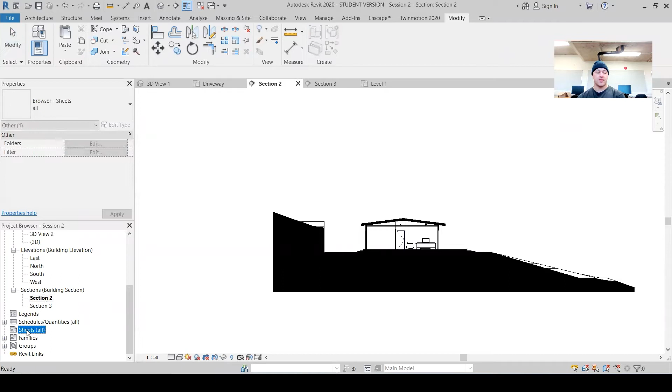So to get started, we want to first create a sheet. This will be kind of like our page where we put our drawing on. So first you want to go down to sheets in our project browser. And if you don't have a sheet already, all you have to do is right click and go new sheet. Now it'll load a little window, and usually it has preset title block pages with different sizes.

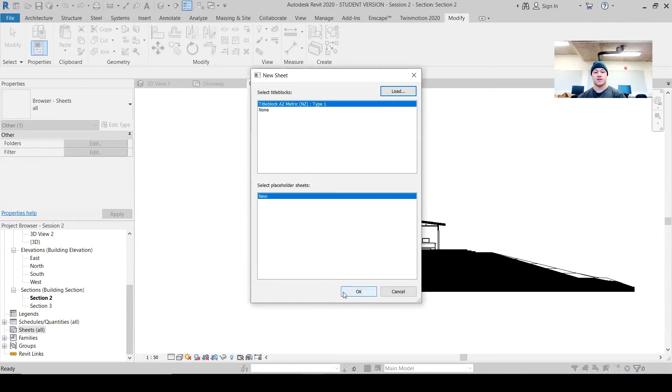If you don't have any, or if you just have one, you can edit it. So we'll go through that now. So if you just select one, or if you go load, you go into the title blocks, there should usually be a few others. But for the meantime, we'll just use this A2 one, and we can edit it and change the size of it as well.

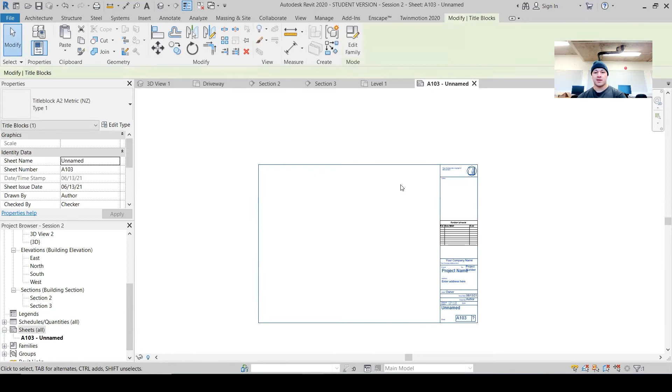So if I just go load, this is our sheet, and it pops up in our project browser as well. Now to edit the size, we'll change this to an A3 sheet. So right now, this is currently 558 millimeters across. So if I want to change this to an A3 size, I want to select the sheet, and then I want to go edit family.

Now it will take me to another window, and this is where we can edit the actual sheet itself. So what I can do is just select all these little text boxes and the lines, and delete them. Really all I want is just this outline for our sheet. So you can just delete all these things.

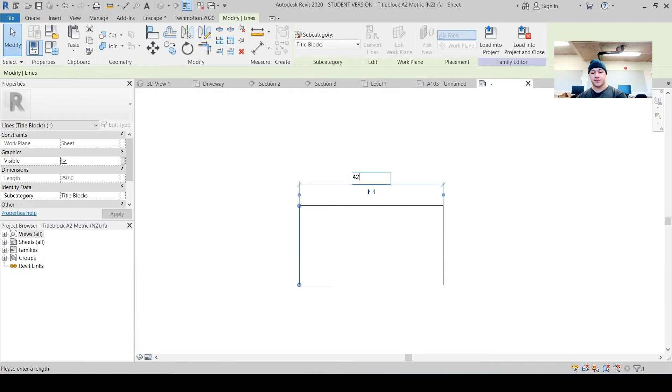Okay, now that we've got this little box here, I want to change it to the dimensions for an A3 sheet. So I'm going to change the height to 297, and change this to 420. Just make sure: 420, 297. Cool. So that's how you change the size to make it A3, or if you want to change it to any other paper size, just get those dimensions out. Again, this is in millimeters.

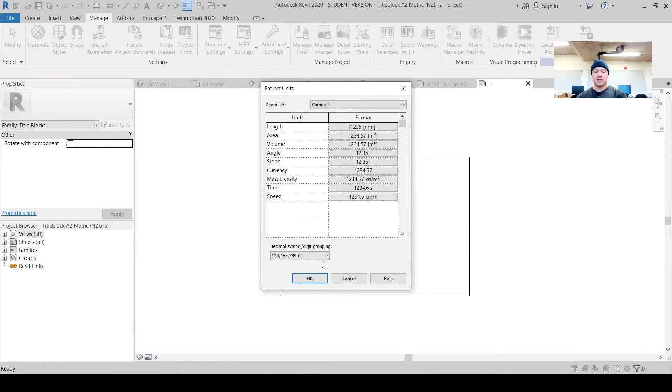If your project's in inches or anything, all you want to do is go manage, go project units, and this is where you can change the units that your project is in. So if it's in inches at the moment, go into manage, project units, and change this back to millimeters or centimeters if you want to use that measurement, and then go okay. Since my project's already in millimeters, it should be all good. So again, 297, 420, that's our A3 sheet.

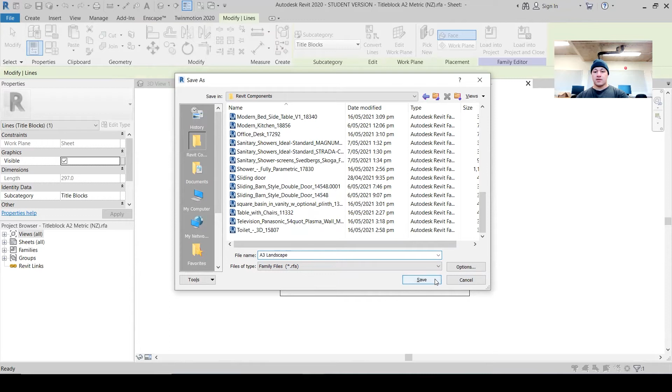Now I want to go load into project and close, and I want to save the changes to this template. I'm going to go yes, and you can save this into a folder that you want. I'm going to call it A3 landscape. Okay, and I'll go save, and then it will load our sheet back into our project. And I can delete this one, and here we have our new A3 sheet. That's pretty much the process in terms of creating a new template.

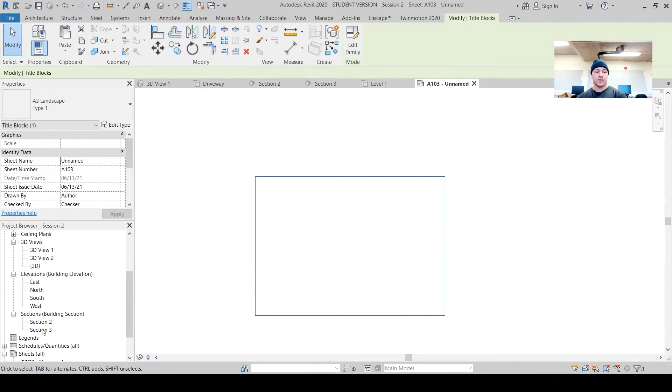To put our drawings onto our sheet, it's a pretty simple process. All you have to do is drag and drop the drawing from the project browser. So if I want to use a section, I just select it here, hold down the left mouse button and drag it onto our sheet, and when I click it in place, it drops our drawing onto our sheet.

As you can see, it's quite a long section, and most of it won't fit onto our paper, but we can edit the scale inside our drawing here. If I put my mouse over this drawing, it shows us the boundary of our drawing. Now, I can't edit the drawing right now.

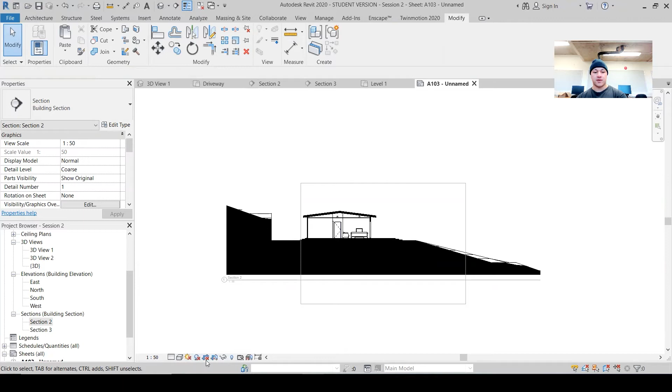However, if I click inside of this section window here, we get our display and graphic options back at the bottom here, and I can change the scale to a smaller scale. So if I change it to 1:200, we can see in relation to the A3 sheet, it's quite small. So if I change it to maybe 1:100, that's a better scale.

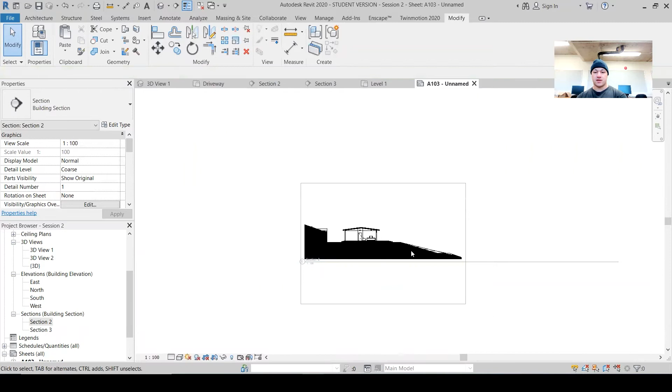And then if I click out of the window and select it, I can then move this across and move it inside our A3 sheet here. And if I want to edit it again, I'm going to click inside of this little box here, inside of the window. And here we can see I can actually edit the drawing as if I was actually in the section view itself. However, if I click outside of that area again, it's deselected and it's more so just the view itself. I can move it freely.

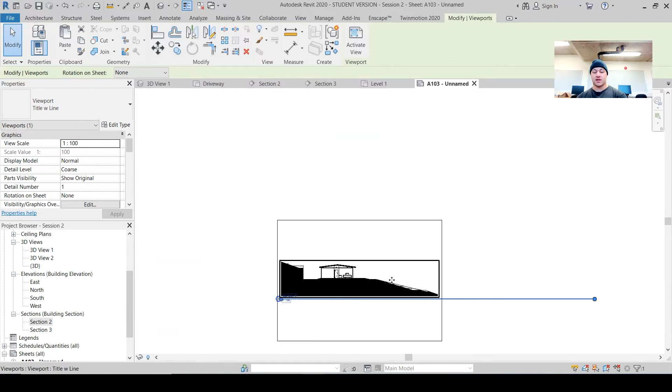So if you want to edit the drawing that you're putting on your sheet, just click inside this window here and click inside the actual drawing window. And then if you just want to move it, click outside of it just so it doesn't select everything in the drawing itself. To get rid of these lines or these titles, what we have to do here is click on the sheet, and then on this little drop down menu here, you can go no title, and it should get rid of that box for you.

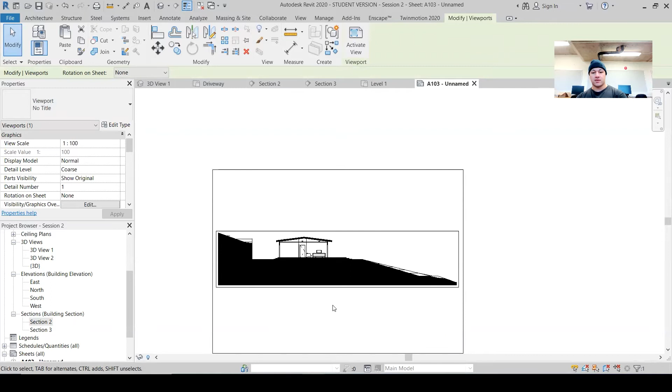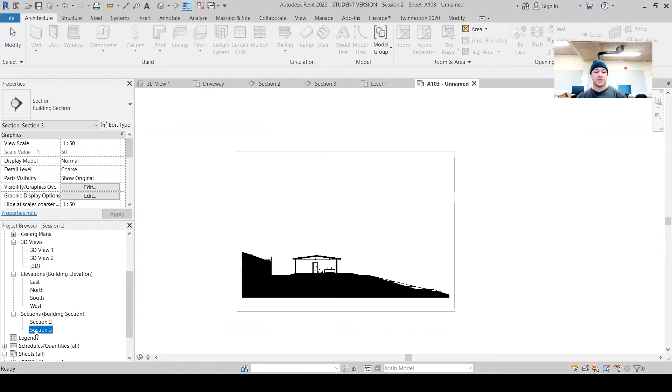Cool. So pretty much from here, it's up to you whether you want to add more drawings onto your sheet. If you just wanted to export the section, that's fine. If you wanted to export multiple drawings on the same sheet, same process again, just drag and drop your view or your drawing onto the sheet.

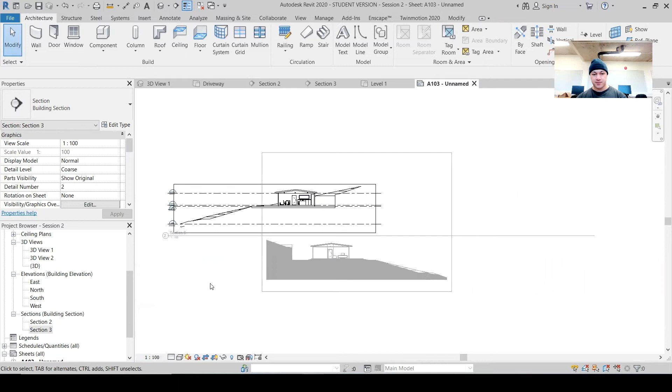Again, if I wanted to change the scale for this one, I'm going to double click inside of this box here, inside of the window, and then we can change all the properties really. And I'll change this to 1 to 100. I'll click outside of it so I can move it with the sheet view. And then if I wanted to crop this, it doesn't really matter if you don't crop it.

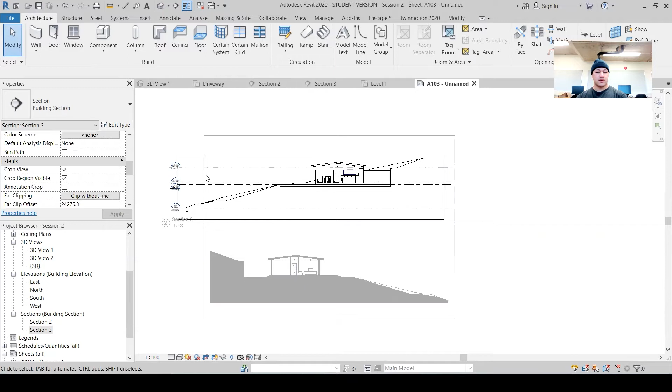Again, if we export this as an A3 sheet, anything outside of our A3 box here will be cropped off regardless. However, if I wanted to crop it out here, I would click inside this window so I can change the properties for our actual drawing. Then I'll edit our crop box. I'll put that in.

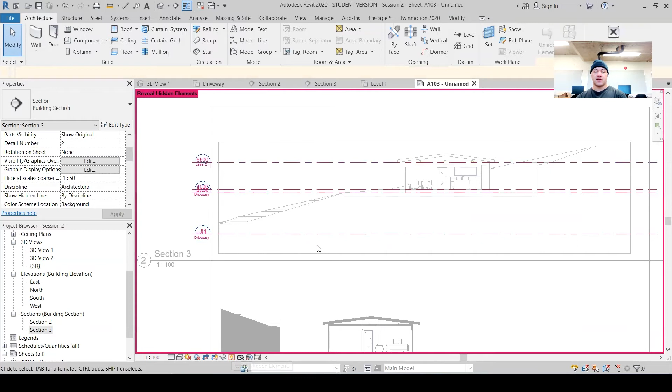And then again, if we want to change or hide any lines, you can select the floor plan lines. So if these are getting in the way, again, we can go EH. And if we wanted to bring them back, we want to go into this little icon here, reveal hidden elements. And then if you select these, go unhide element or EU on your keyboard to bring them back. If you want to just close that, there's a little X there.

And same process again, if you want to get rid of this line and these titles here, go no title, you can easily add them in Photoshop. Again, if you want to get rid of this box, you can hide it. So if I click back in here, select that crop region visible, and I apply that, and there we have it.

So if you wanted to export multiple drawings on the same page, that's really the process how to do it. Again, if you wanted to increase the scale, just click inside these window boxes here. But we'll just use this as an example to print. So I've got my two sections, I know this one's not filled in properly, but we'll just keep it as that, just to carry on.

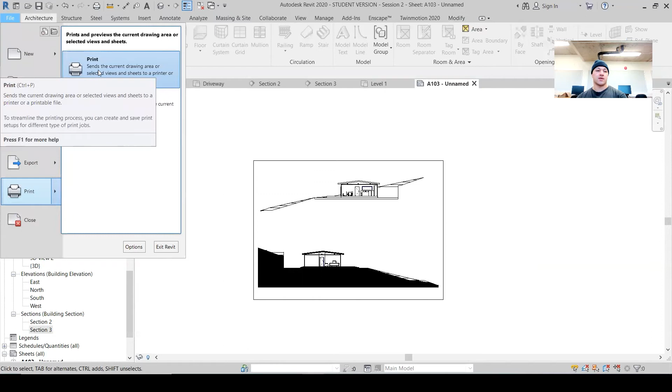So once you've got your drawings on your sheet, we want to go into File, and we want to go into Print. You can also just press Control P, the keyboard shortcut. Now you get your print window here. If you have multiple printers connected to your computer, they'll be in this little drop down menu here. But we want to go into Adobe PDF.

We want to go PDF because it's exporting as a PDF, and having our scale drawings in relation to our paper sizes is quite important. Otherwise, the scale might kind of blow out or increase or decrease. So we just want to keep it at that Adobe PDF. Next, we want to go into the properties.

The first thing we want to look at is this output folder. If we go into this prompt for Adobe PDF file name, it's pretty much just selecting where you want to save it. So if you have a specific folder that you want to save it in, that's really what this refers to, and really just changing the name.

What happens if we press documents, whenever we export the page, it will go directly to our documents folder on your computer. This is quite good because it's quite fast. For some reason, I've found that when this option is on, it takes a bit to load. We'll keep this on for now, but if it does take a bit to load, I'll change this back to documents, and hopefully it loads up better.

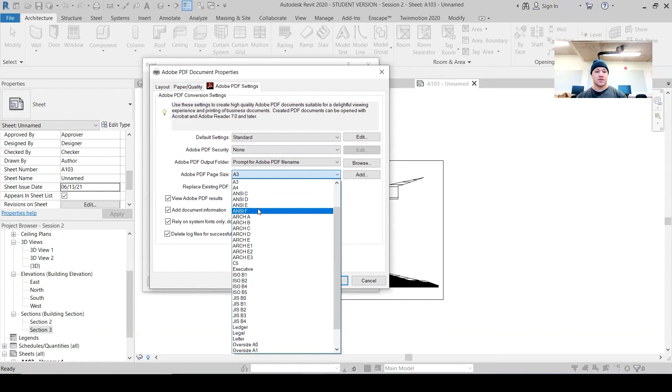And over here as well, page size, we want to change this to A3. Again, you can have multiple pages at different sizes as well. So if this is an A3, you'd go A3, but you can also make an A4 page. And then if it was A4 pages that you were printing, you would change that to A4. But we'll keep that at A3 just for now.

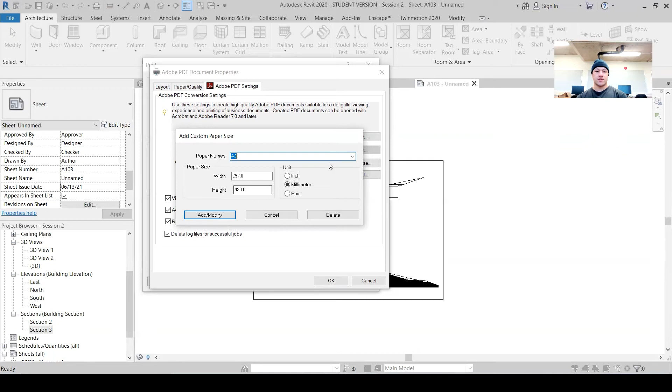You can have your own. So if you wanted multiple sections or multiple plans all on a single page, but you couldn't fit it on an A3, you can just make your own. However, just for this, we'll keep it at our A3 page. So we'll go OK. Again, here on the browse, you can change the name and change where it's saved. And setup, this is our next one we want to go to. Oh, actually, no, we'll go into our print range.

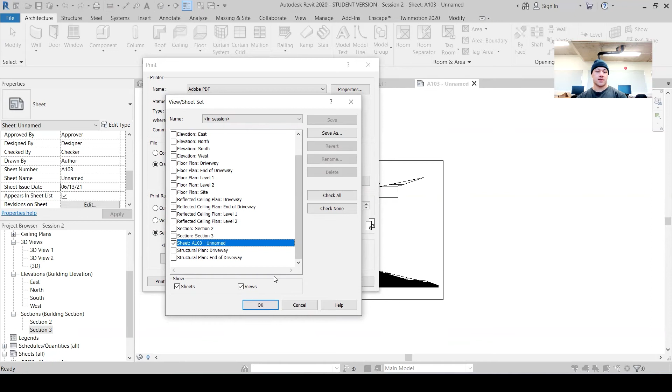Current window is usually the one that's open. So the one that's actually open on our tabs here, that's the one that will print. Or you can go and select the view sheets. We want to scroll down and go into sheet A103. You can change the name in the project browser, but this is the one we want to export. So we'll go OK. And we'll say yes. Go OK. Now we want to go into setup and the settings on the setup.

And here again, if you haven't changed that paper size in the properties tab in the previous window, this is where you would change it. Again, we want to keep it to A3. And now on these two options here, we want to make sure this is at center, but we want to make sure this is on zoom. However, once we put it on zoom, we can change this. We see this goes into the offset. Click on zoom, change this back to center.

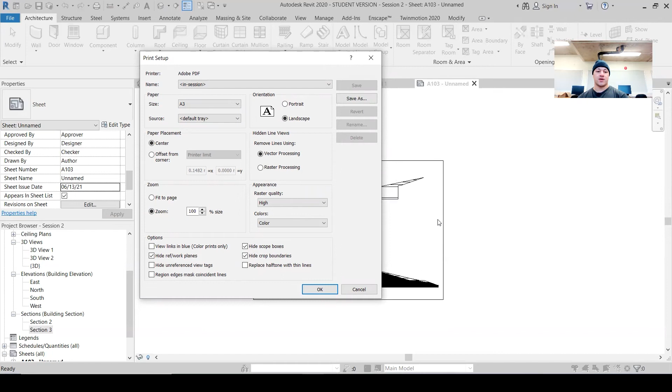The next thing we want to do is make sure we've got our orientation right. So if you wanted to export this as portrait, you could just simply select the page outline that we made previously. So when I changed it to 420 mils by 297, all you have to do is just select that box and use the rotate tool, change it to portrait.

So the next thing you want to look at is our vector and raster processing. Just to keep it short, vector processing is better for line drawings. Raster processing is used more for drawings that have shadows, or for renders as well. So since we're exporting line drawings, we want to keep it to vector processing because it comes out in better quality as well. The next thing we want to do is on raster quality, we want to go into presentation,

which makes it the nicest quality, and colors, depending on what kind of drawings you're going for. If you just want to make it black lines, just choose the option that suits your drawings. So I'll just go black lines for this one. And now that we're all sorted, I'm just going to go OK. And again, you can save these settings for future sessions.

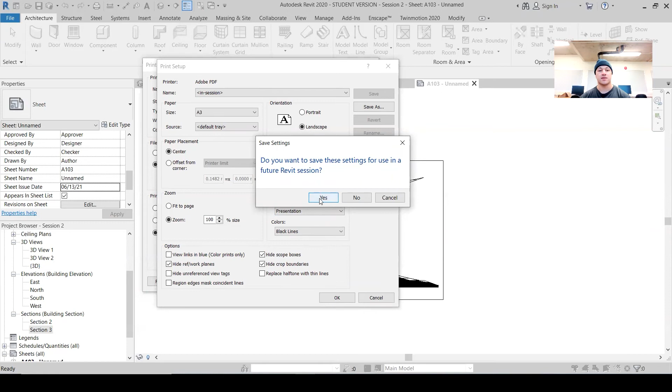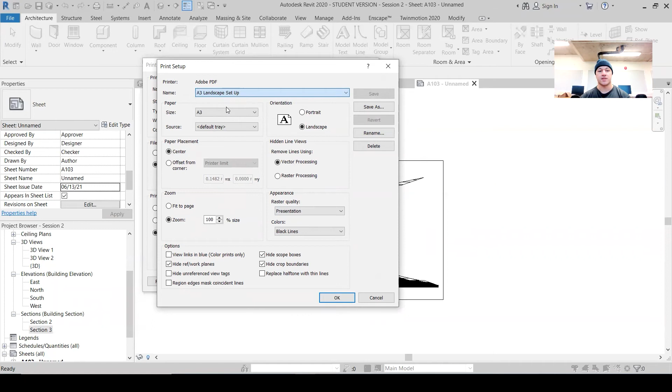The only thing you'd probably have to change is either the orientation or the paper size, or even the colors as well, if you have some colored lines. So I'll go yes, and I'll just say A3 landscape setup. And then if I go OK, if I go back to the setup, I'll have the different options that we can have. So you can do this for your A4 page, you can do this for an A2 page as well. You just set that and then it'll change all the settings that you had saved before.

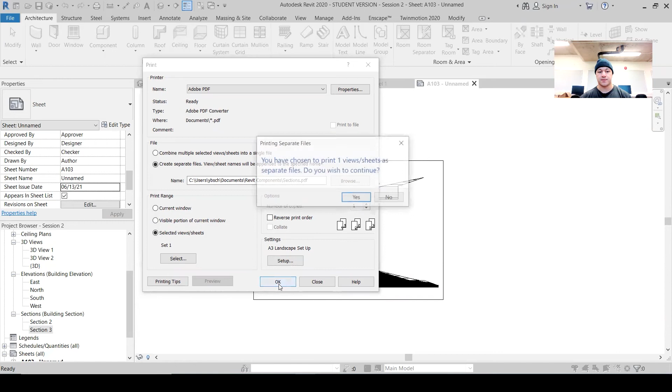So now that we're all good, again, you can go browse and then I'll change this to, let's just say, sections and I would save. Okay, now that we've got all that sorted, all you have to do is go OK. And then I want to go yes. And then again, it'll give you the option of where to save it. Again, you can take all that off. We'll just go sections. So I'll go save. And it takes a while for it to load.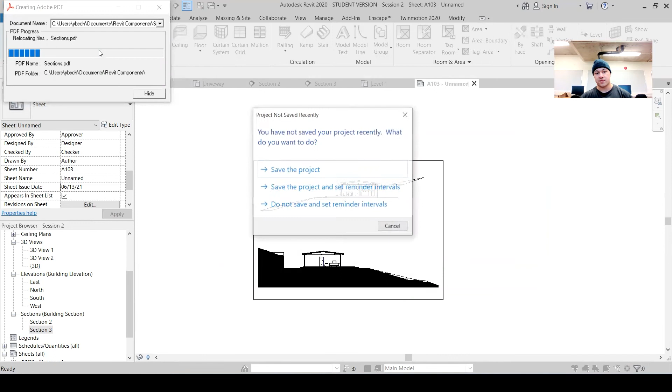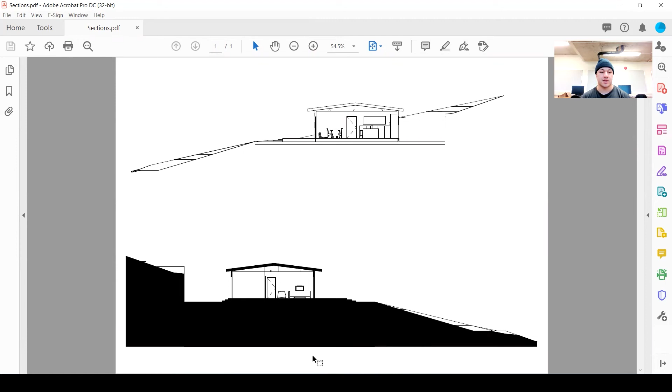And here we can see it's loaded up. If I open up here, it should come up as the same kind of size as we exported it before. The reason we try and keep it on these kinds of size papers is because it's easier to recognize the scale, or keeps the scale intact. When you're dealing with different sizes of paper, it's a bit difficult to trace that scale. But that's pretty much how you export it as a PDF.

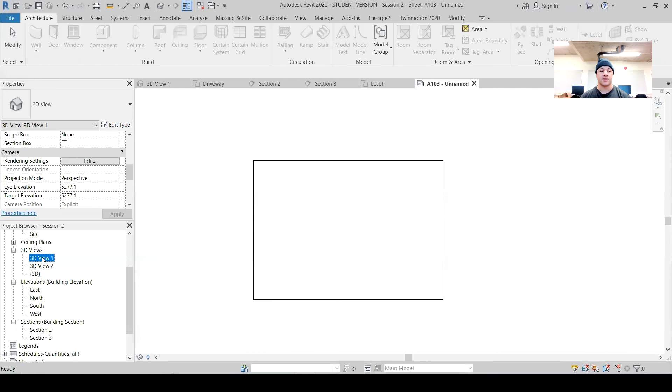You can also do this with 3D drawings as well. So if I want to put this one onto a sheet, I go back onto my sheet, select that, left click, hold down the left mouse button again, and drag and drop.

Now to get the same result, because you can't scale perspective drawings - if I double click on this view here, it has perspective where it would have the scale. If we want to change the size or the outline of our drawing, we want to select inside, so I've double clicked inside the drawing here.

So you want to double click inside the drawing and the outline. If I select that, we have our size crop. Now you can change these dimensions depending on what type of size paper you have. Since this is an A3, I change this to the A3 dimensions. I can make this smaller as well - if I wanted to make this 250, maybe 250.

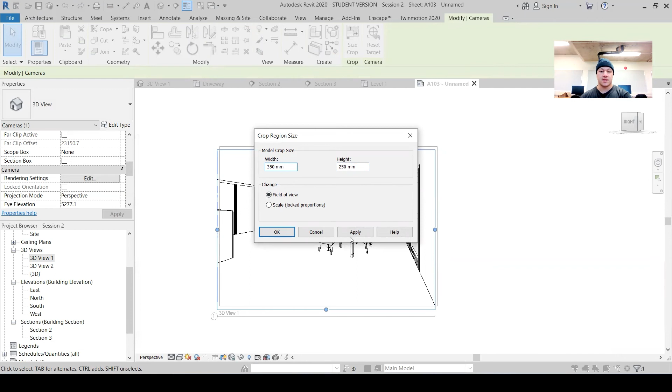This will change the outlines of my drawing. Here we can see it makes it a bit smaller, and I can make it fit inside the page more. And if I do this 420, change this back to 297.

If I don't want this outline again, I just go no title. And if I want to hide this actual outline, I go back onto crop region visible, untick that and go apply. That gets rid of that outline box. Then if I click out of the window again, I just select it - this is when I can move it manually.

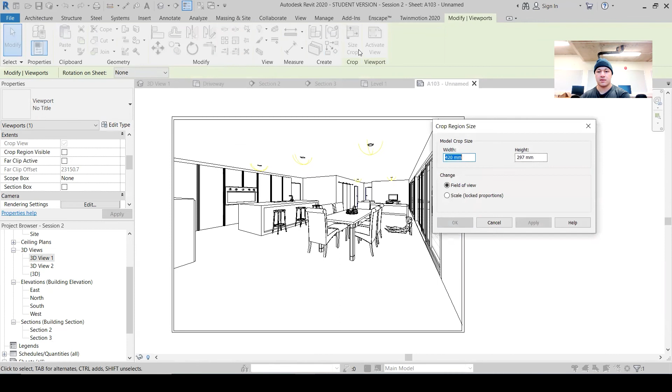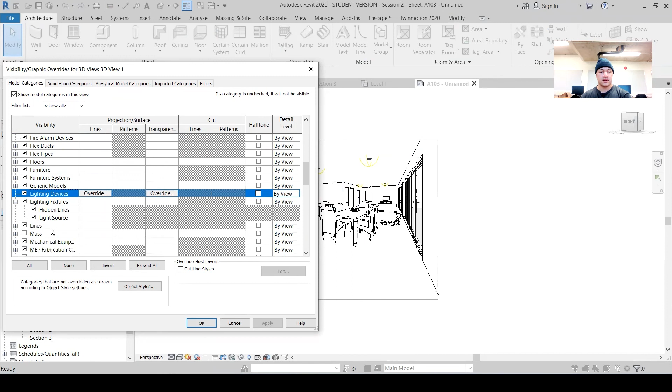Same thing, if I want to export this as a PDF, I'll get rid of these yellow lines as well. So if I want to hide these, go VG, go lighting fixtures, go light source, apply.

Now, if I wanted to export this, before we export, when you're using 3D views, another thing is to try and turn off shadows. If you don't turn off the shadows, it will change it to raster processing, and it might not come out as clean, or the line work might not come out as nice.

You want to make sure that if the shadows are on, it'd come out really gray. So if I want to turn these off just to get the outlines - if you wanted shadows, that'd be good, but if you use shadows, it will use raster processing and it'll be a lower quality output. But let's carry on.

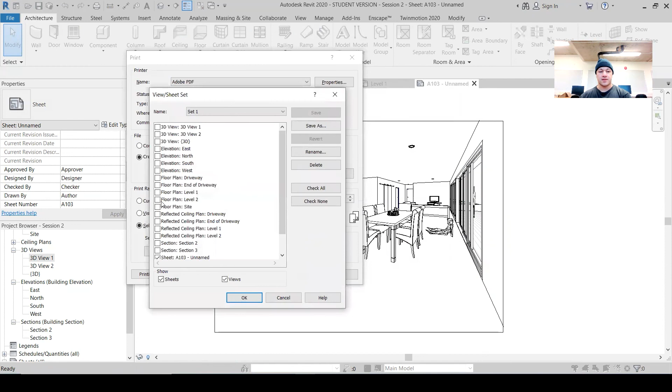We'll just go Control P, to print. Select the view - you can go current window as well. So if I just go current window, it's whatever one's open, on our tab here. And since the setup's so weird, I'm gonna go okay. I'm gonna go okay again.

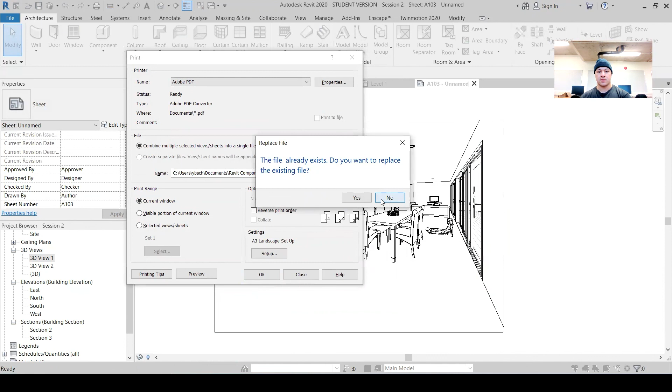I'm gonna change the name this time - 3D view. Go okay. Again, save it in that same folder.

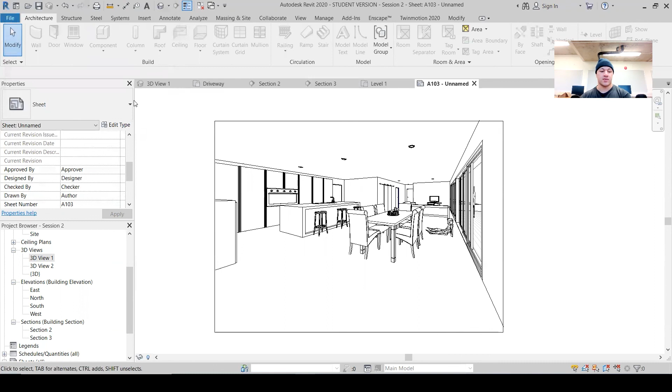Now, if it does take a bit of time, like this one is taking right now, I'll go back to the same properties option that I mentioned before. If it is taking a bit of time, what I would usually do is change this to documents, go OK, and then go OK again.

And now we can see it's just popped up. So it loads - sometimes it just loads quicker when you change that option to documents. I'm not too sure why, it's just something I've found out as I've used Revit.

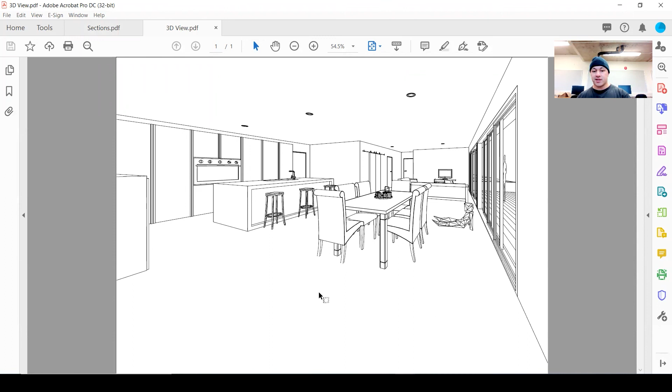So if that first option doesn't work when it's the Adobe PDF prompt for name, I change that properties option to documents, and then it just loads up a bit quicker. But that's pretty much how you export your drawings as PDFs. With the vector line processing, the lines are quite nice, quite clean as well. That's pretty much just the basics in terms of exporting it as a PDF.